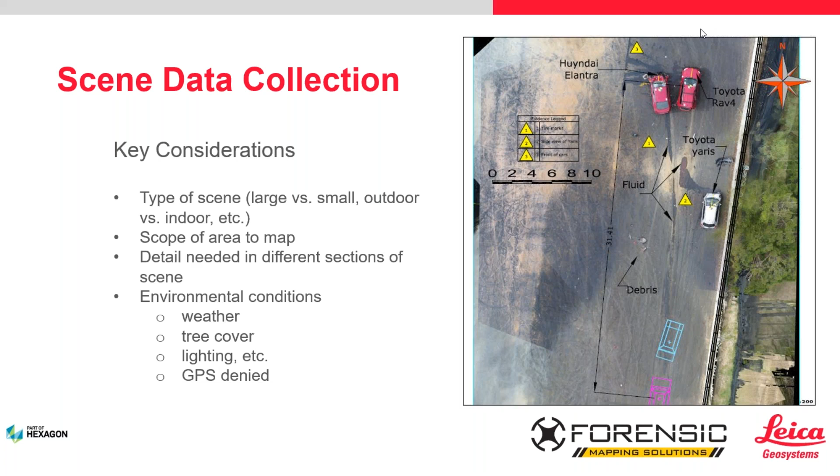So now you're going to be in a situation where it's not going to be a choice. Yes, there are some drones you can hand fly without GPS, but again, you have to look at the right tool for the toolbox.

So there's some other key considerations that we want to think about as well in regards to the drone use. So the whole idea of airspace and authorizations. I'm sure most people that are here understand this or may have a remote pilot's license, a Part 107 certificate now, but as public safety, you do have to have a Part 107 remote pilot certificate.

There are still some misconceptions out there that the fact that you're in public safety exempts you from having a remote pilot certificate, and that is not true unless you are flying under what's called a COA, or certificate of authorization, with your department. There are some larger departments that have that, and those of you that have it know how that works, but you need one or the other to be able to operate a drone for doing this type of work.

So then we get into issues with airspace, what's called controlled airspace, areas where the FAA has determined that you're not going to be able to operate a drone, and that could be at certain altitudes only.

It could also be because of what's called a TFR, or a temporary flight restriction, which are used for dignitary movements, security for events like baseball and football, and other security issues for the country that you would not be able to fly. However, as public safety, there is a way that you can get an emergency waiver, and it comes from a group of the FAA called the System Operations Support Center.

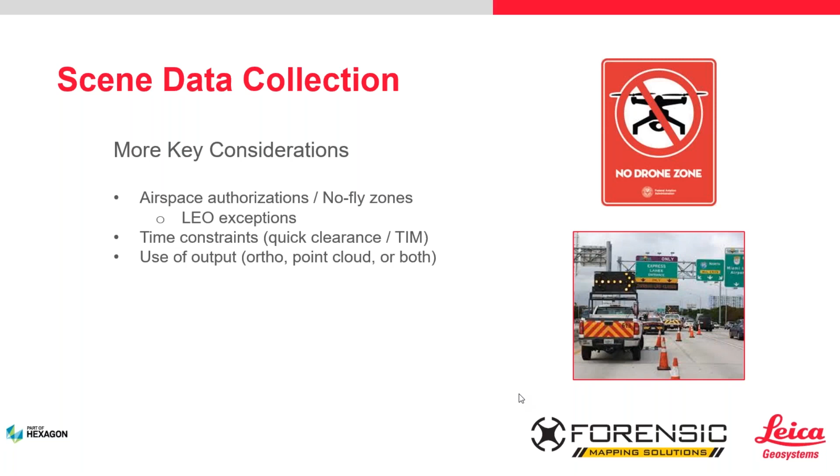Okay, great. So the reason we asked that question about ground control points is ground control points are key to an accurate aerial photogrammetry project. Ground control points, think of them as anchors in our scene that have known position, and we'll get into that in a second. Because of the known positions, the software can use those positions, which are three-dimensional in most cases, and process the project in Pix4D to give you an accurate representation of the scene. And when I say accurate, we're talking survey grade accuracy - I like to call it evidentiary grade accuracy. We're going to get to hundredths of a foot, and we'll be able to testify to the fact that these diagrams are accurate.

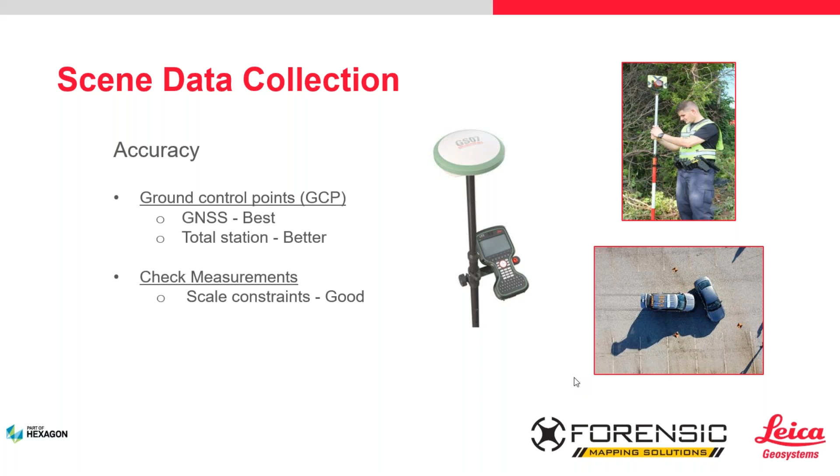All right, so now we're going to talk about the import options that we have, and I'll try to go through this quickly. So I had talked to you about the 2 things, an ortho image and the point cloud. With this, we're going to just stick in the ortho mosaic image category.

So when you use Pix4D, and other photogrammetry software are similar, you're going to get an orthomosaic image, which means all the images are processed so they're 90 degrees to the ground, and then the software stitches them together into one large image.

And with that, in Pix4D, if you use RTK GPS, you're going to get a TIFF, which is like a JPEG but it's a TIFF file, an image file, and you're going to get a positioning file that tells it where in the state plane coordinate system that image is located. So once I have that, I'm going to show you shortly how we can bring that into Map 360, and it will place it in state plane coordinate in the right location.

We'll verify that through the GPS points we're going to show you. When I say geo-referenced ortho, you can also do this with an orthomosaic using a total station to get your ground control. Then you'll be in a local coordinate system at 0,0,0. And if your total station was at 0,0,0, and so was your image, those will line up as well.

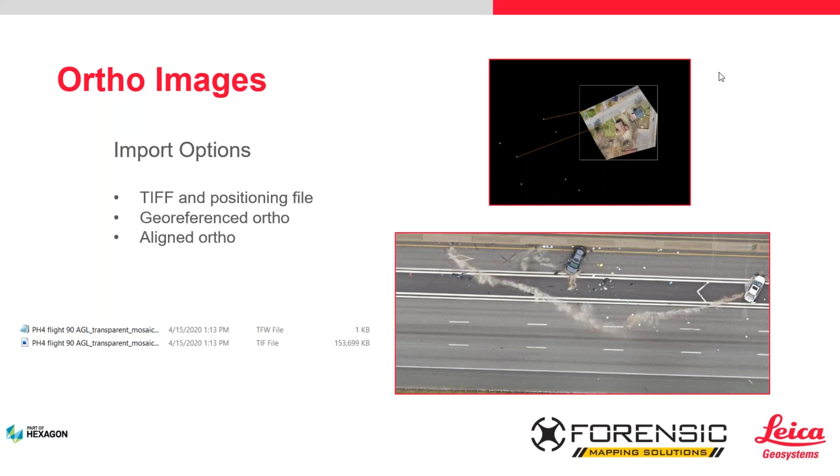So at this point we're going to do a few more poll questions, and then we're going to jump into some demonstration on how to do this.

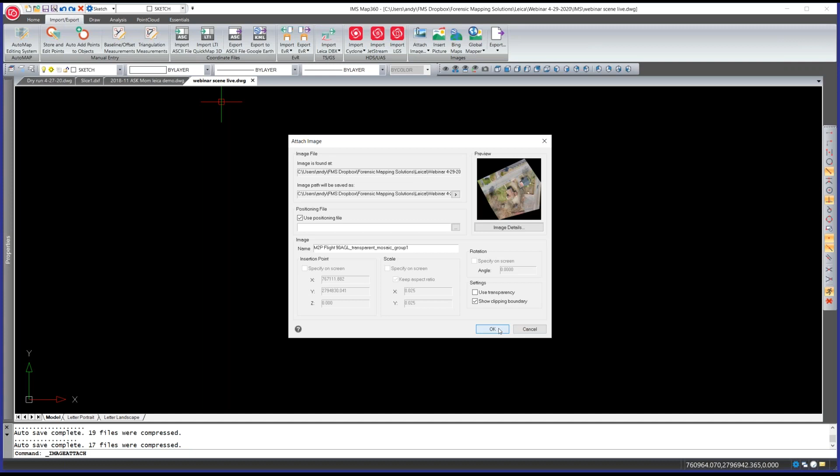Now you can see right here that it says use positioning file. It's automatically checked, but if you don't see that checked, you want to check it. That's going to tell it where to put this in state plane coordinate into my drawing. Once I hit OK, I can double click, have it zoom extents, and then there is my scaled orthomosaic image of a mock scene that you can see on your screen.

As you can also see, even though it's over a computer, the detail of this is highly accurate. It is what's called ground sampling distance of 1 centimeter, meaning there's 1 centimeter between pixels. For perspective, a Google image is 30 centimeters—this is 1 centimeter. So you have pretty good accuracy, which means I can zoom in very close to get detail in the image.

Now what I'm going to show you is, now we have the image. Let's assume we used a GPS, the GNSS system, to get our ground control, but we also took points with it. So now I can go and overlay the points into my drawing in Map 360.

The way I would do that is just say import. I'm going to tell it the coordinates are comma delimited, meaning there's a comma between them, and it's just a text file in the correct order—so it's going to be XYZ or YXZ. My points are YXZ: northing, easting, elevation, pretty standard. So now I'm just going to select that, and I'm going to grab those points.

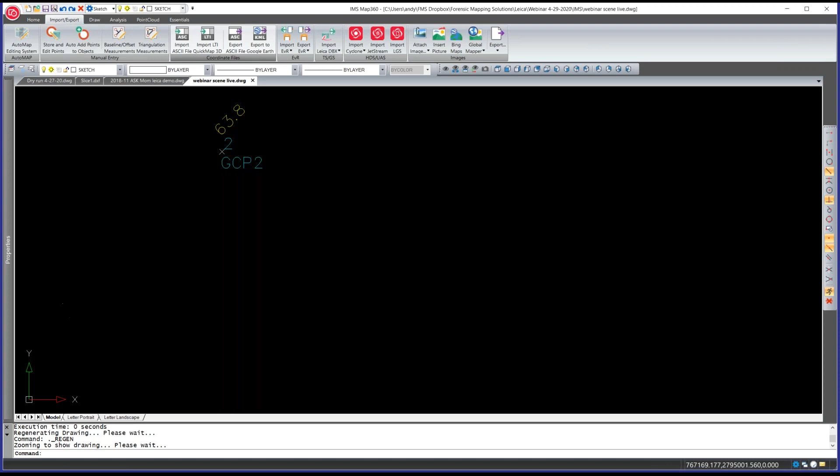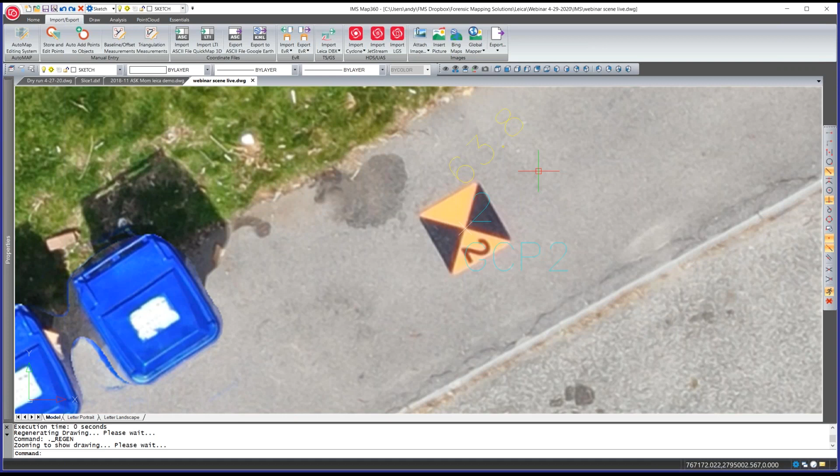Once they import, they're going to drop in, and as you can see, as I zoom in, the point for target GCP number 2 is right smack dab in the middle of GCP number 2. And that's because the image and the points are in the same coordinate system. That yellow 63.8 is the elevation above sea level, the exact elevation that this scene is at, rather than how many feet above the 0 point that you set your total station up.

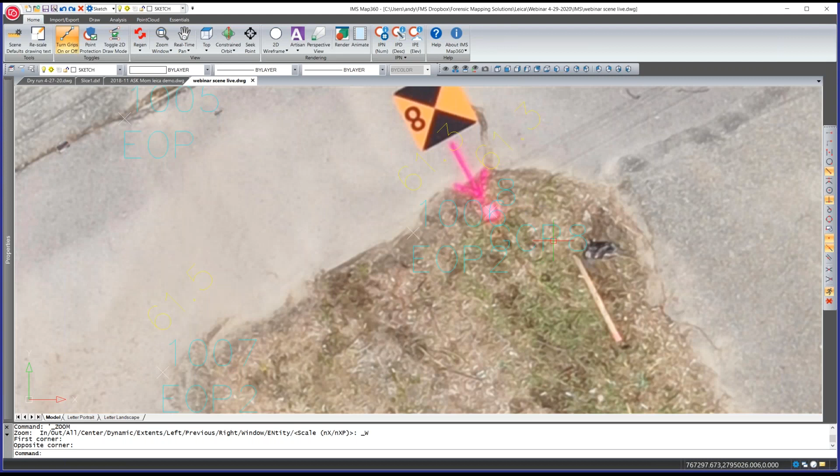So let me zoom in here a little bit as well. And if I zoom a window, if I come into this area here, I can show you that we also have edge of pavement shots. We also have our GCP, and this one is actually on this bound, this pink painted surveyor's bound, and the sign's just pointing to it. So you can see that this whole thing is all to scale.

And then to take it one step further, we can also bring in a point cloud on top of this, just as long as it's in state plane coordinates, as long as it's in the same coordinate system, we can bring the point cloud in. So I'm going to do that. And again, this was all Leica. This was done with the Leica RTC 360. So it's as simple as just grabbing the file and bringing it in.

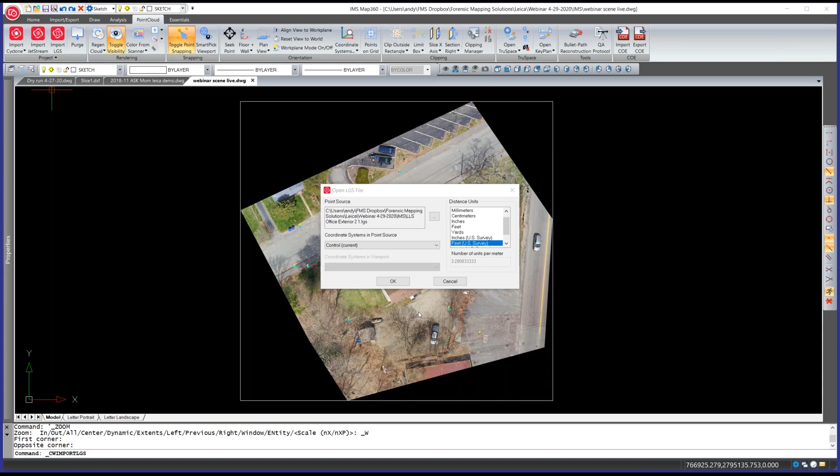And okay. And you'll see it populates the point cloud, but what's happening now is the photo is on top of it. So I'm just going to click the photo, and I'm going to tell it to send it to the back. And now you can see that the 3D point cloud from the laser scanner is sitting right on top of the image and is all lined up with our GPS points.

So just to show you as well, I made a little mock scene on top of the ortho image from this and just created it up. It's supposed to look like a pedestrian crash, and you can see that all of the features you can draw right on top of the image.

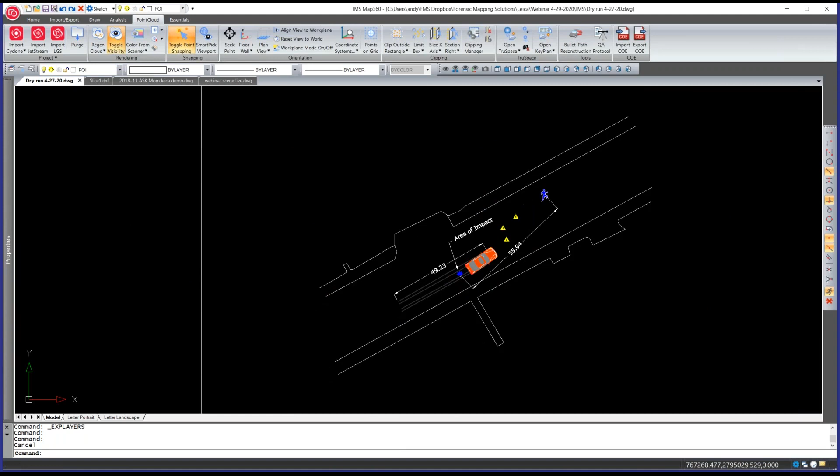Now, a lot of us were used to, if I shut that ortho image off, looking at something like this that's kind of like a stick drawing, edges of road and whatnot. And some people would fill in the sidewalks and the roadway, but it tells a much better story having the image on in the background where everything is. So this is something that you can do with an ortho mosaic image, and that's part of the benefit to doing this. It actually looks like the scene you're at.

One more. This here was from an actual crash scene that I did a momentum analysis with. So again, if I zoom a window in here, you can see that I was able to plot the impact and rests from the evidence at the scene. You can see the paint marks on the road where the evidence was marked. Let me just zoom in one more time. And the furrows and the stuff through the grass.

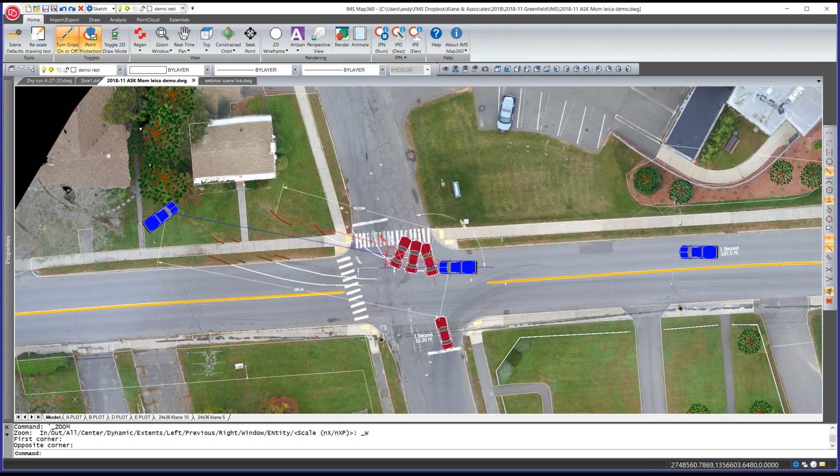And now you can see I measured all my angles and distances here and was able to put that in and do my calculations for conservation of momentum. So I just wanted to show you what you can do with this for real, so to say. All right, and then just one more thing to show you for those that are laser scanning with Leica.

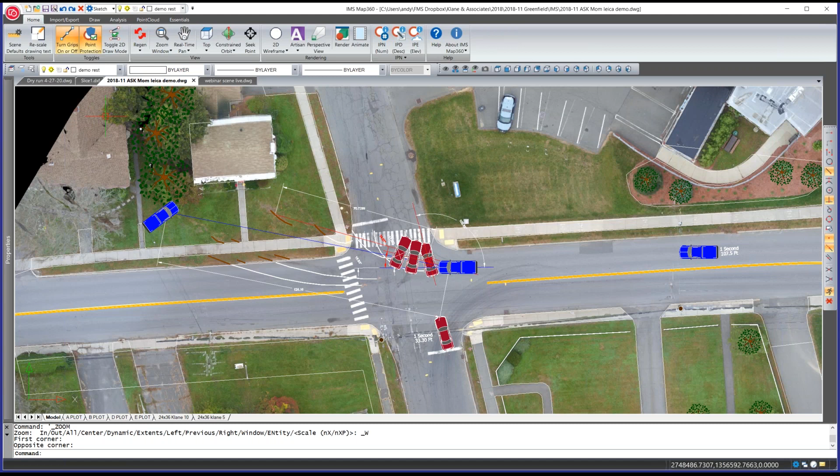So that's what I have for you at this point, and I think we're going to be moving into question and answer period.